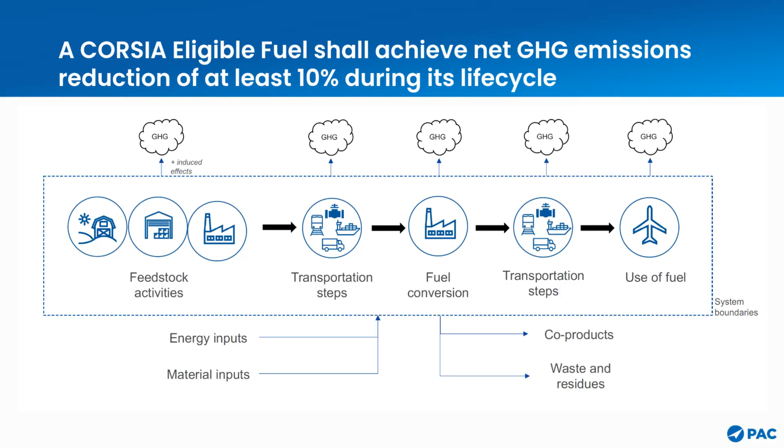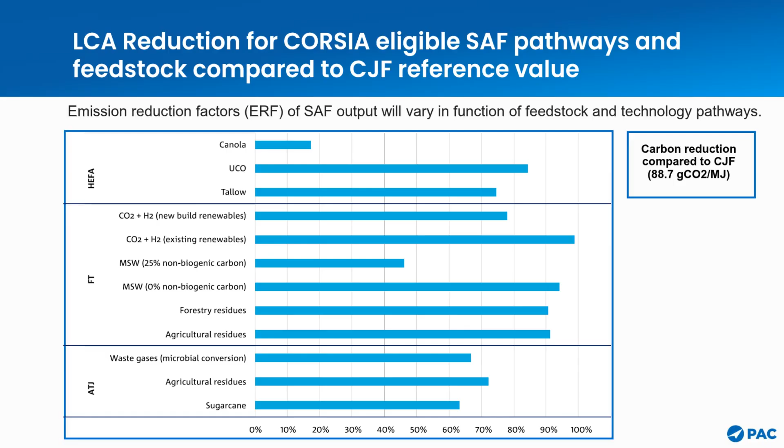Yeah, next, please. Yeah, next slide, please. Yeah, so this is very, so go back. Sorry, go back.

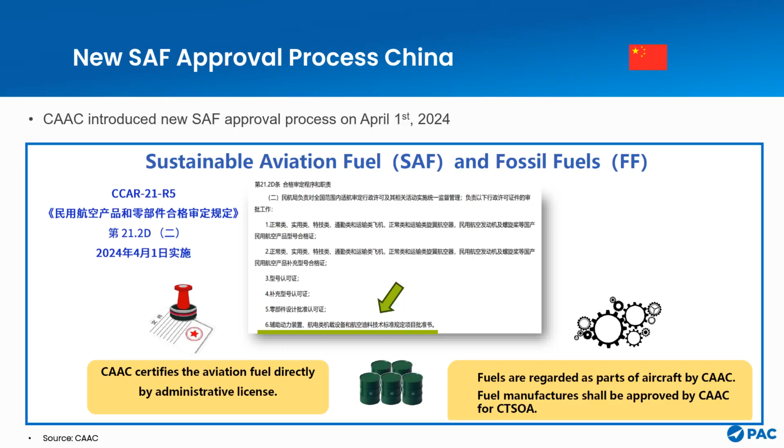In 2009, the ASTM committee started the preparation for ASTM 4054, a technical committee to review and approve the pathways. Since then, 8 pathways have officially been approved as annexes of 7566. Topsoe will talk about the specific pathways later, so I will not go into detail. In 2016, ICAO published the CORSIA scheme. Only in 2020 did we see the pricing mechanism published by Argus as well as S&P Global.

And only by 2022, 2023, ICAO said who can approve the certification: ISCC and RSB. So by 2024, the SAF industry was ready: the technology pathway is mature, policy is ready, pricing is ready, and certification bodies are ready. So it's now time to scale up. Next page.

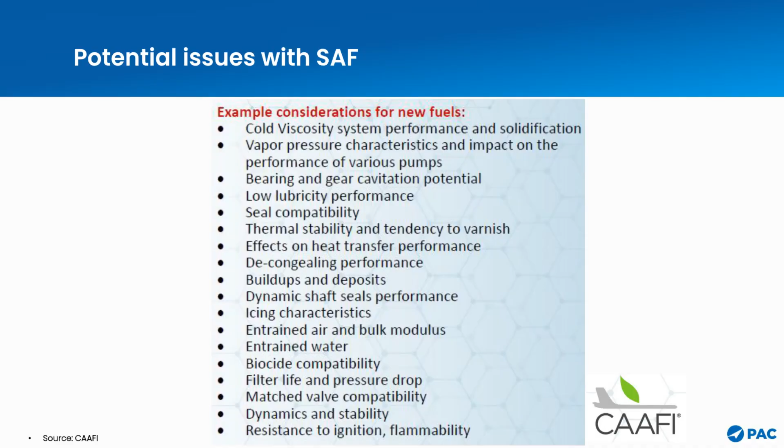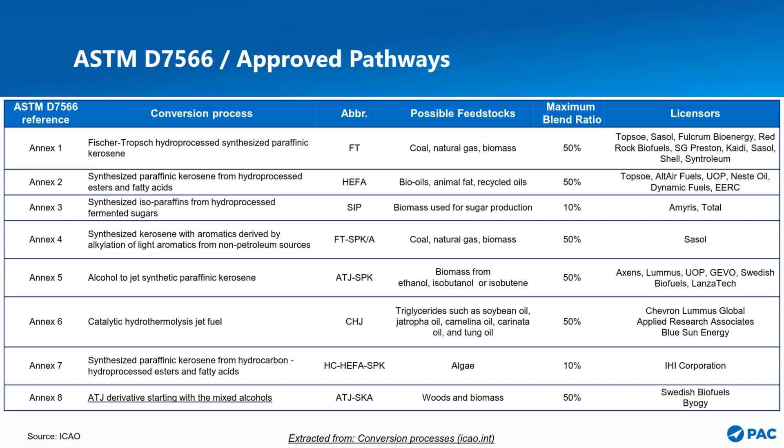These are the 8 approved pathways under ASTM 7566, starting with Fischer-Tropsch and HEFA. Next page. In addition to the 8 approved pathways, there are still new pathways being reviewed and potentially approved by the ASTM committee, including MTJ, the last one, plus pyrolysis oil potentially as a feedstock. Next page, please.

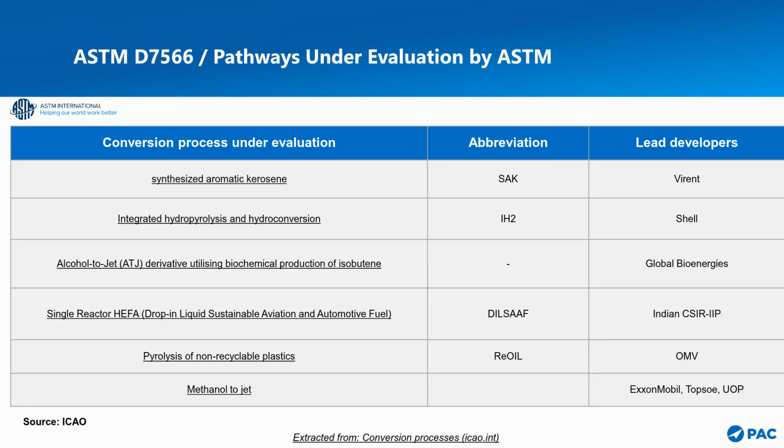This is the landscape showing what has been approved, by which developers, in which country, and who is developing new pathways queued up for approval by the ASTM committee. By the way, the ASTM committee meets twice a year. The next meeting will be in June, with a ballot on the new pathway, and the following meeting will be in December. Next page.

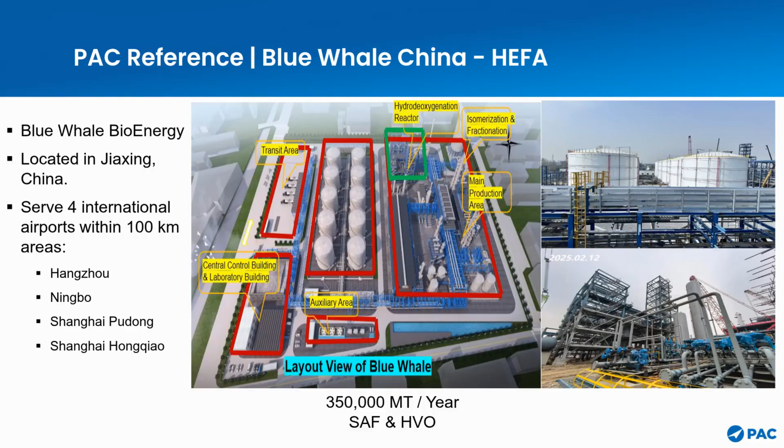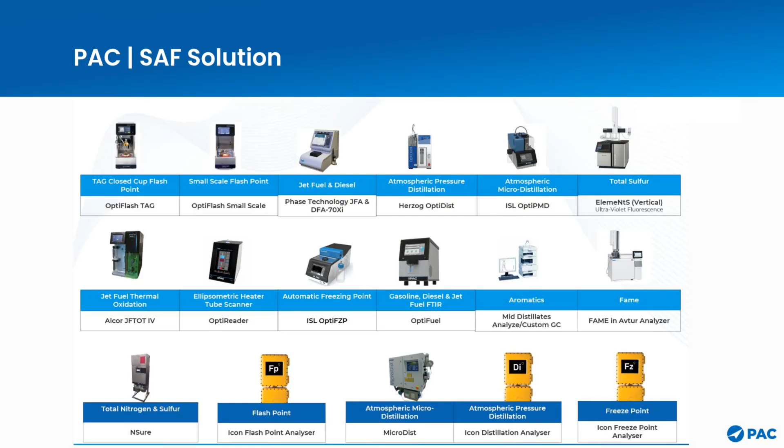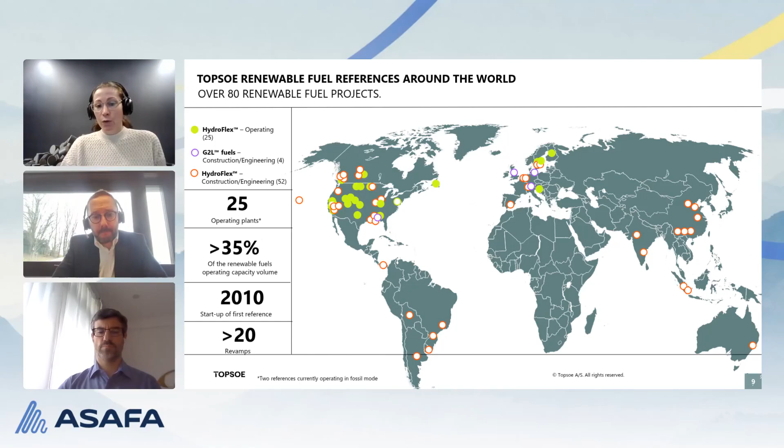If you go to the next slide, please. We address something which is specific for the HEFA technology, which we have seen in the early days of diesel, and we are also seeing it now with SAF, and that is co-processing. It can be for diesel anything between 0 and 100%. We have seen many plants for renewable diesel undergoing this journey, starting with very small amount of renewables in the feedstock and going into fully renewable mode.

We also see that refiners and biorefiners are over time increasingly happy for this flexibility, maybe even flexing between fossil and renewables. But specifically, if we look at SAF, we see a lot of traction recently for this ASTM approved pathway of 5 volumetric percent renewables co-processing, specifically in the hydrotreaters. And this is interesting for several reasons.

Obviously, it is a low-hanging fruit in terms of how quickly you can put SAF product on the market. The catalyst that you have to change for this application is not cheap, but still basically there's no capex. So it is attractive from a capex to opex point of view and timeline, but it is also very interesting for introduction of new feedstocks.

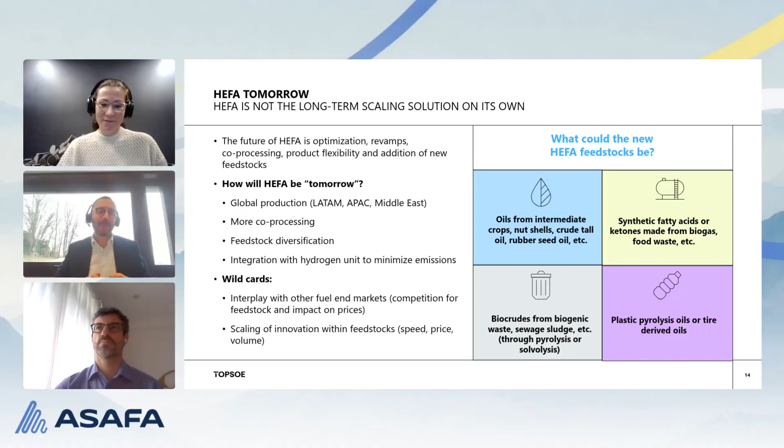So what will come after HEFA, hopefully? We'll talk about ethanol to jet, and then we have a few slides comparing Fischer-Tropsch versus methanol to jet. Maybe not fully relevant yet for the APAC region, but it's still nice to see. SAF is a global market, so hopefully this will be relevant enough. So let's spend a bit of time on ethanol to jet. That's the next deployable SAF pathway.

It is, after HEFA, the most cost-efficient solution for many years to come, until the cost of cellulosic jet and eSAF decreases. There's a lot of ethanol industry. I think Gabriel mentioned in the introduction all the work in Thailand on ethanol and the interest of ASAFA to talk about ethanol to jet in the next event in June, and it's really interesting.

It minimizes risk, because Melissa mentioned the appetite for feedstock for HEFA, for renewable diesel, for marine, for FAME. So it's really de-risking, because the price volatility of fats, oils, and greases is quite significant, and it's the main share of the cost of SAF. So I think that's a good way to de-risk a SAF project: use the ethanol industry, the markets, the value chain. And yes, it's a mature technology.

So when and why will ethanol to jet deploy? We have basically five assumptions, five planets that need to be aligned for this to happen. First of all, we need SAF demand to grow. If we remain at a few million tons, HEFA will do the trick, and you don't need more. But as soon as feedstocks become limited for HEFA, renewable diesel, and FAME, then we believe first generation ethanol to jet will deploy.

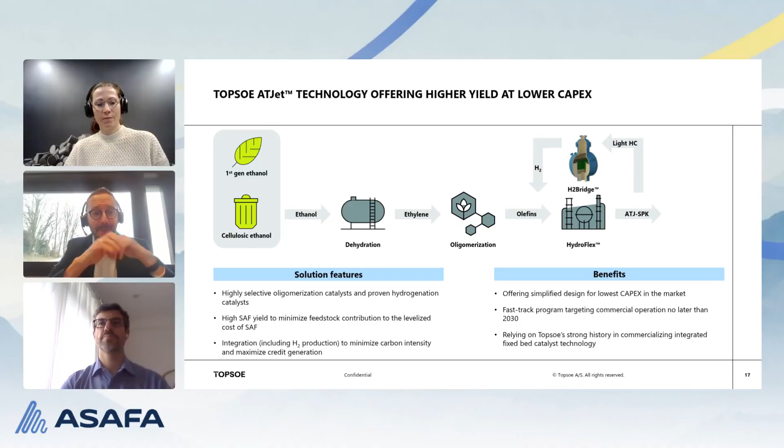Okay, how much time do we have? About 10 minutes. Few slides. I know we should not go quickly through slides, but I'm going to do it anyway.

But basically to compare Fischer-Tropsch versus methanol to jet. So we're licensing both technologies, and you hear a lot of myths out there. So let's go through that. So Europe and the UK, and this is only for eSAF. You could also use this technology through gasification or biogas, but the next 3 slides will be really focusing on eSAF. eSAF may not be relevant yet in APAC, but the EU and the UK, at least according to mandates, will need 18 million tons of eSAF by 2050.

Right now, the EU is using 40 million tons of jet fuel. So about half of what the EU is using now would be eSAF, which is a massive amount. We won't talk about how much feedstock is needed in terms of renewable energy and CO2, but it's really interesting. We believe both pathways will have a role to play. And the idea is to explain what, who, and when.

So Fischer-Tropsch: if you have centralized plants close to your feedstocks, and you can control the whole value chain, we believe FT is more interesting. Many investors are not always super happy with methanol to jet, because your project would depend on other methanol projects outside your control happening before your methanol to jet process works. So if controlling your full value chain is important, we believe FT is the pathway to go.

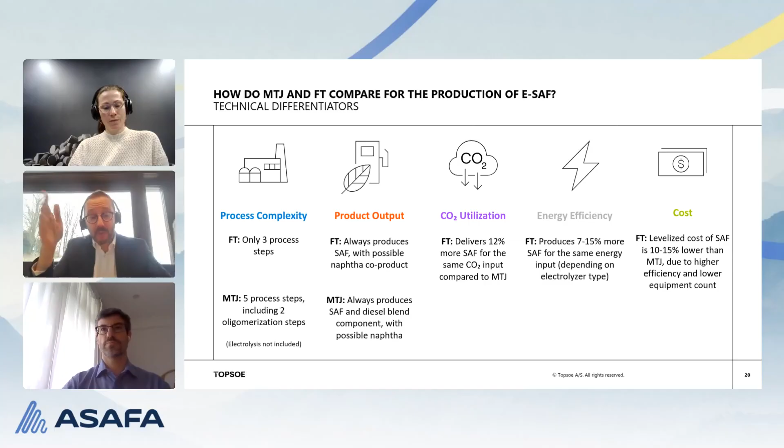And cost, based on the yield difference and the energy efficiency, basically levelized cost will be 10 to 15% lower than methanol to jet. Again, many assumptions, but we'll elaborate that in some papers that will be soon available.

Operational differentiators. So here, again, from left to right, infrastructure needs. Fischer-Tropsch is suited for centralized plants and full control of the value chain. Methanol to jet, you have decentralized methanol production, but you depend on your methanol supply chain. And then it could be project-to-project risk because you might not control, again, the methanol project.

There's a lot of discussion on intermittency. Our take is that you don't build a $1 billion or euro plant not to run at full capacity. And especially 50% of the fuel cost is CapEx related. In the next slide you will see the impact of CapEx is really important. Unlike HEFA, where maybe 80, 90% is feedstocks, here for e-SAF, CapEx is really important. So you want full capacity operation of these plants.

Yet power intermittency is sometimes interesting, I would say, for some PowerPoint discussions. So yeah, Fischer-Tropsch can also work under intermittency. You can turn down capacity to 20%. You have some buffer, and methanol to jet, you can also turn down to 10% capacity. But again, I think the second point is more important. You don't build a plant that expensive not to run at full capacity. At least that's our take.

A myth about Fischer-Tropsch. Many people said, oh, it's only for large scale. Not true. You have from 100 barrels per day. There's no issue, and it's proven at scale. Methanol to jet also from 100 barrels per day. Yes, to our knowledge, the selective olefin oligomerization is not proven yet, and of course, methanol to jet is not ASTM approved yet. And I'll skip the last part, and we have 4 minutes to go.

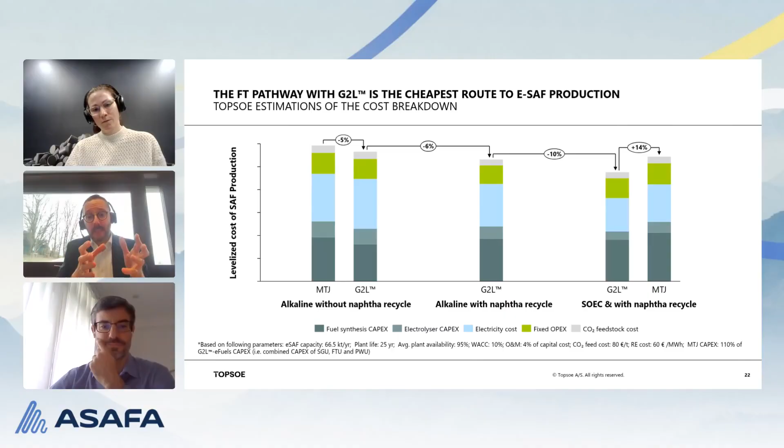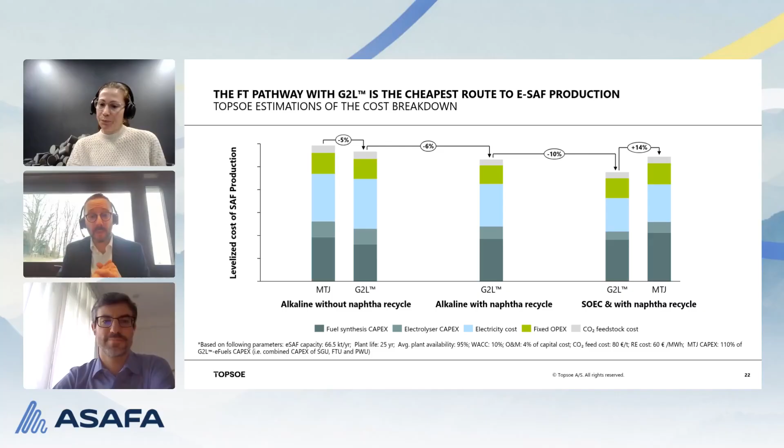Okay, the next slides quickly, which I think will be available, Fabrice. But basically, this is our levelized cost with a cost estimate breakdown. So you can have a look. Basically, it's alkaline without naphtha recycle, with naphtha recycle, and then integration with SOEC. And that's the cost difference we see. You can see each time you go one step to another, you can lower the cost. And we end up with Fischer-Tropsch being cheaper. And that's all, 4 minutes.

We have the take-home messages. Melissa, do you want to take those? Yes, well, it's very brief. I think if we go to the next slide, it is to summarize. Obviously, we have more a system challenge than a technology challenge. Technology is ready for deployment. We still need to bring the costs down, and infrastructure needs to be put in place.

HEFA has been an enabler for SAF. It's the dominant pathway today, but probably in the future we will look at it as a relatively small portion, and the other pathways are going to be scaling up SAF up to 2050. ETJ, as we also discussed, is more about diversification of feedstock. We will see, depending on how second generation ethanol works, where we will actually see ETJ. But we do expect first generation ETJ to deploy relatively soon.

And finally, as Sylvain just mentioned, FT and MTJ are both viable depending on the context. Basically, you will have chosen one or the other, depending on the specific site, feedstock and situation.

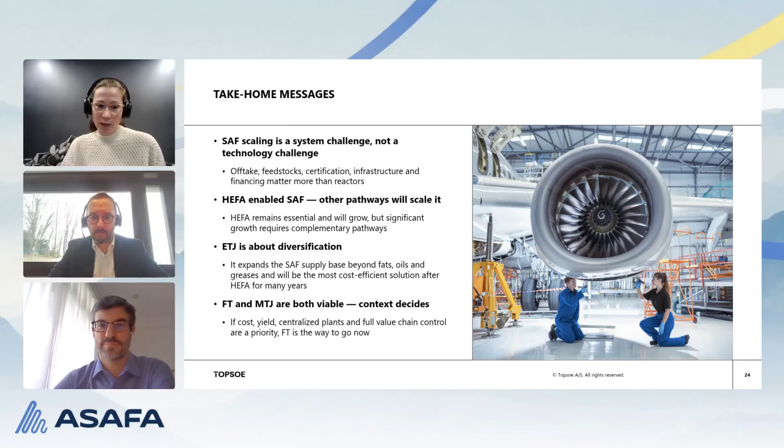And I can see some questions are coming, which is great. And maybe I can take the first question or the only question. I'm not sure, I can only see one popping up on the sewage sludge. Should I take it? Yes, Fabrice, is that okay? Yeah, can we take the question? Yeah, there are a few questions. Fabrice, you're muted, I think. Yeah, quite a few questions. Yeah, so this one from Riva.

Well, yeah, you will still need to have the ASTM approval. We think that very soon you will be able to co-process again up to 5%, probably a lot of new feedstocks, but you will not be able to have a full-blown 100% plant from sewage sludge pyrolysis oil or hydrothermal liquefaction biocrude just yet. But it is possible to make SAF out of it. Yes, and the company started petitioning ASTM for 100% from sewage sludge, so it's not approved yet. You can make renewable diesel, you can make marine fuel out of it, but SAF not yet.

Yes, and then we see the one on when do we expect ETJ to start playing a significant role? And that's a good question, right? What is a significant role? We do expect slow deployment to start and ramp up towards 2035. I don't think we will see ethanol to jet meeting half the capacity we see today, probably not before 2040 or beyond, right? That's the thing, it takes time. It also depends on the interest of the ethanol industry and the whole value chain. So Fabrice, you want to say something? No, that's exactly what you said.